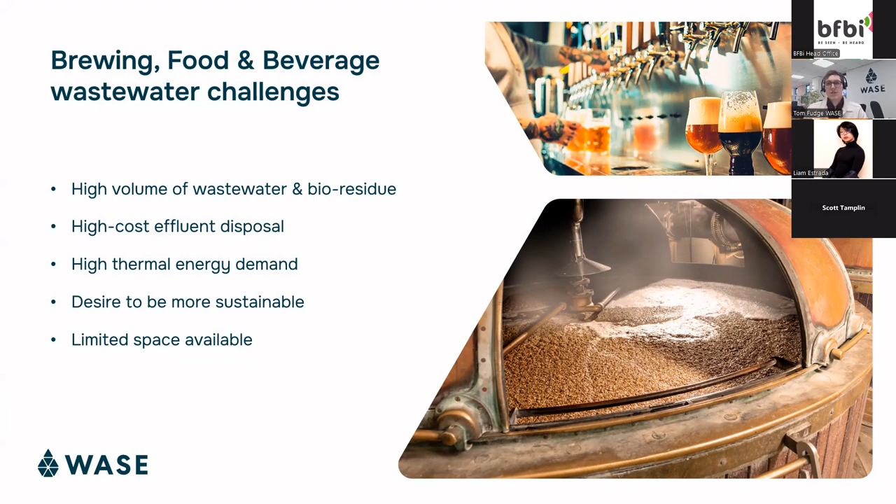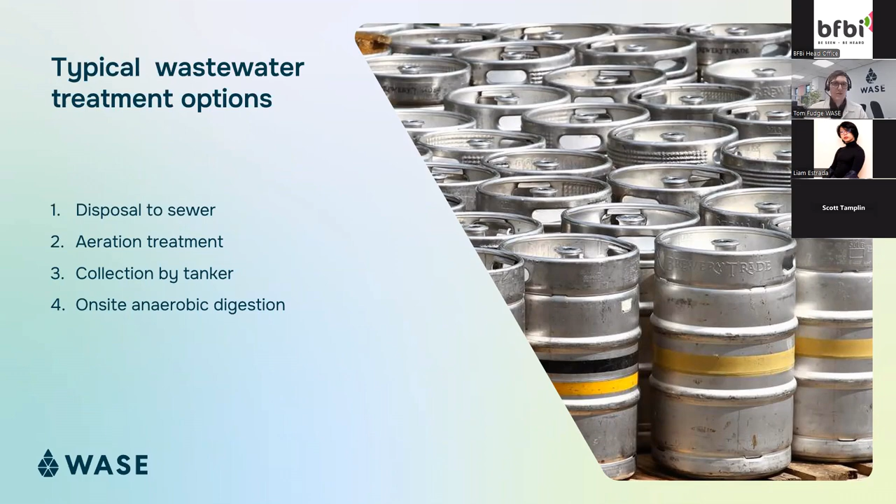If we look at the typical wastewater treatment options available to food and beverage organizations: disposal to sewer, if you're able to do that; on-site aeration treatment; collection by tankering to have it hauled off site; or on-site anaerobic digestion. We're going to explore these later.

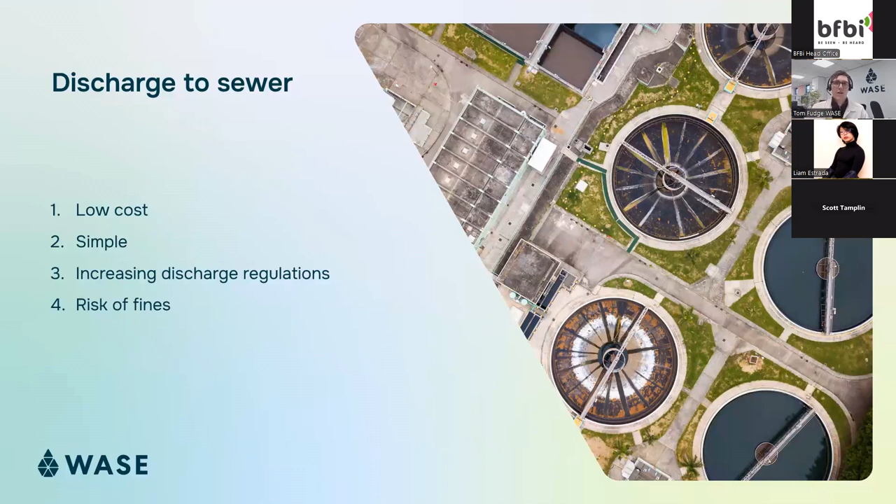Looking at discharge to sewer, this is quite a low cost, simple solution if you're able to do it. But there are increasing discharge regulations and permits on what you can put down the drain, and quite often you'll need to segregate a lot of the high strength wastewater. There's also potential risk of fines that we see for some of our customers when they get an influx of high COD wastewater. Having something on site can build in much more resilience.

Discharging to sewer also has quite a big impact. As many people know, in the UK 2% of energy demand goes on wastewater treatment at utilities, and this is because they're based on aeration processes. When you add higher strength wastewater from the food and beverage sector into the sewer, you're actually diluting it with a lot of rainwater and other types of wastewater, making it much more energy intensive to treat because you're treating a much higher volume of dilute waste.

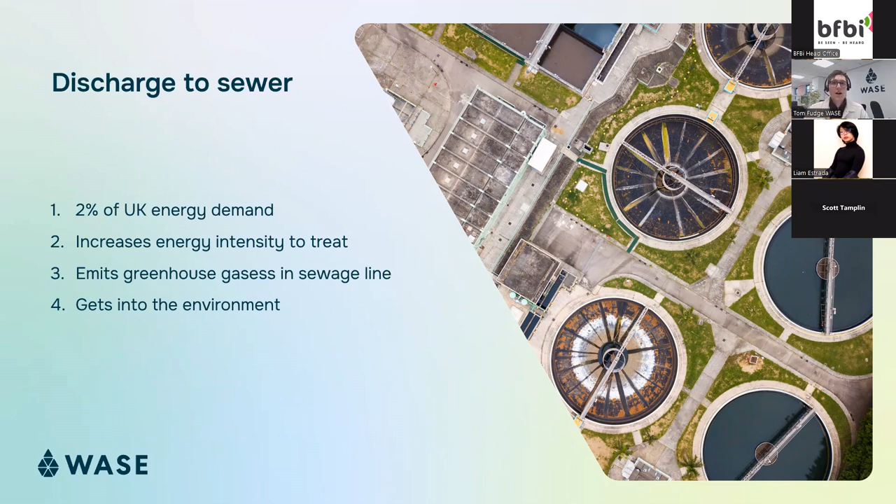It can then emit greenhouse gases in the sewage line. There's new research looking at the methane that can be emitted because it's being broken down anaerobically in the sewage treatment line. And on days with really heavy rainfall, there's a risk it could get into the environment as well.

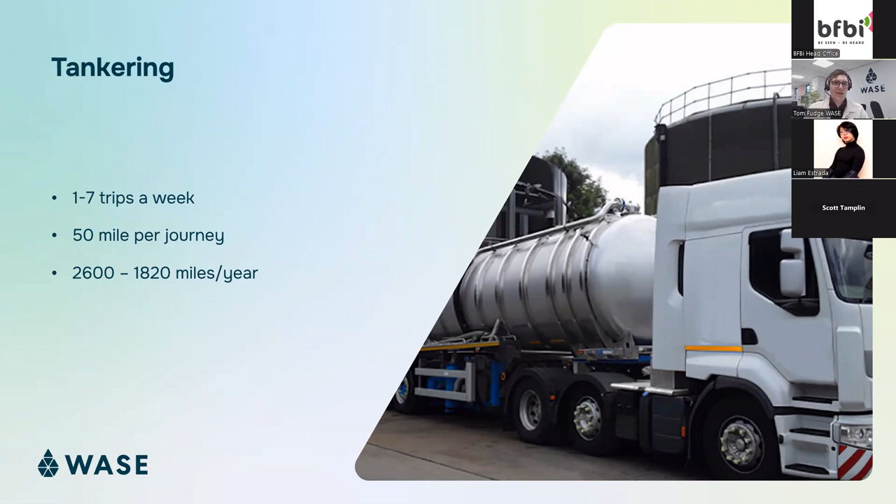If we look at tankering, which is really common within the food and beverage sector, to take off that higher strength wastewater or bioresidue that can't go into the sewer or be treated on-site, typically we see customers doing 1 to 7 trips a week, maybe 50 miles per journey. That could be 2,600 to 18,000 miles a year. If you were tankering 7 times a week doing 18,000 miles, that's the equivalent of driving a truck from Bristol to Ghana, South Africa, Kenya, and all the way back home. That's a huge amount of distance traveling and driving that waste around the organization.

I'm assuming you want to drive all your food products around that way, but not your wastewater. To do this, you're probably paying over £100,000, emitting 22 tons of carbon, and using 8,000 litres of diesel. But really importantly, you're driving away about 300 to 400 megawatt hours of renewable energy that you could recover on site using the right solutions.

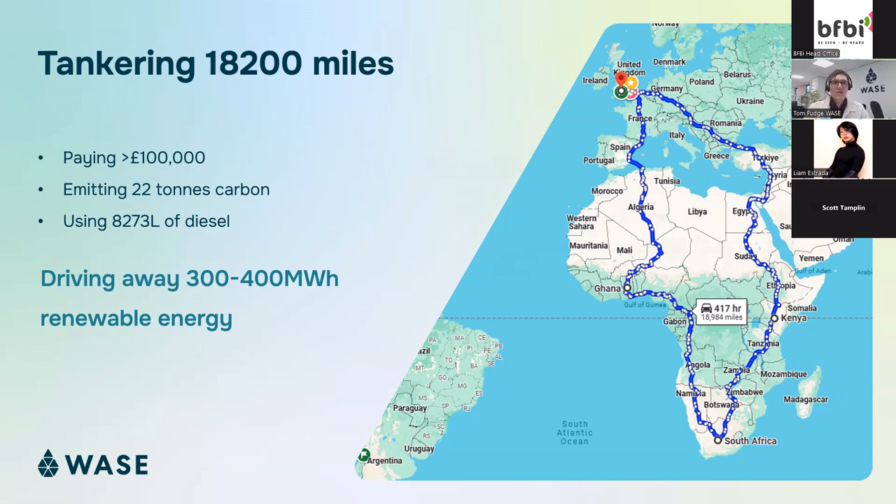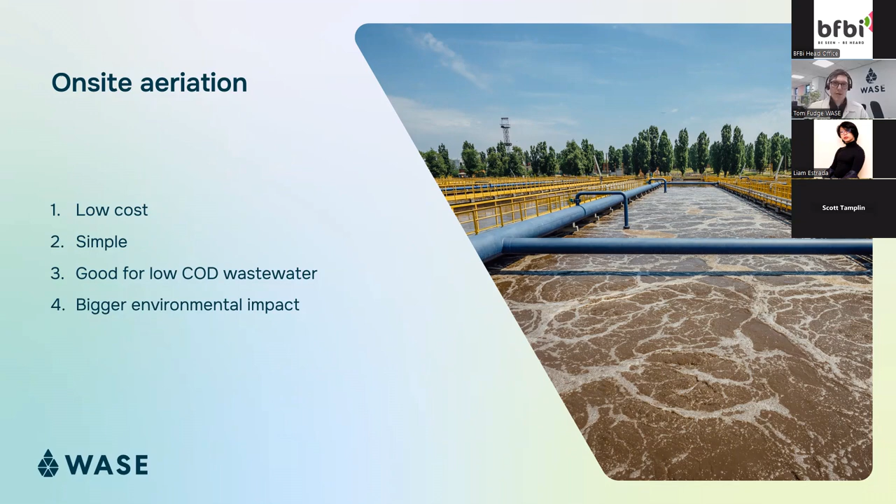Using aeration type technologies, it's quite a low cost solution. It's quite simple to operate, but you do have to be aware of the bacteria and the biology within the system. It's good for lower strength COD wastewater, but it does have a bigger environmental impact because it is quite energy intensive.

You have quite tried and tested technologies. A lot of organizations have DAF systems, but you have quite high chemical usage with DAF, and you generally generate high volumes of sludge, especially where you're adding polymers into the process that then needs to be tankered and hauled off site.

You then have moving bed biofilm reactors, membrane bioreactors, and membrane aerated biofilm reactors, all increasing in efficiency, but also increasing in cost.

But one thing with aerobic treatment is you always generate high volumes of sludge, and these are really good for targeting lower strength wastewater treatment.

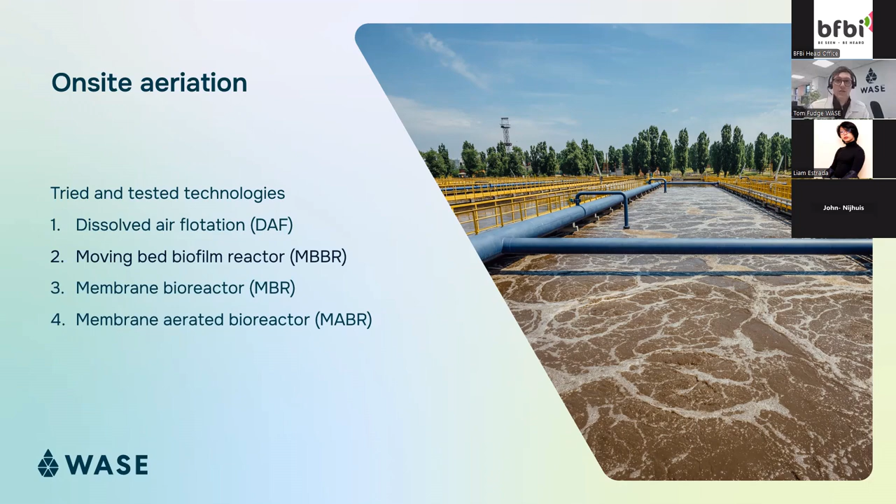So just recapping, you have lower cost to high capital cost for aeration treatments, with DAF being very low cost, MABRs being a much higher cost. You have the high energy demand, the additional chemicals, and you generate sludge.

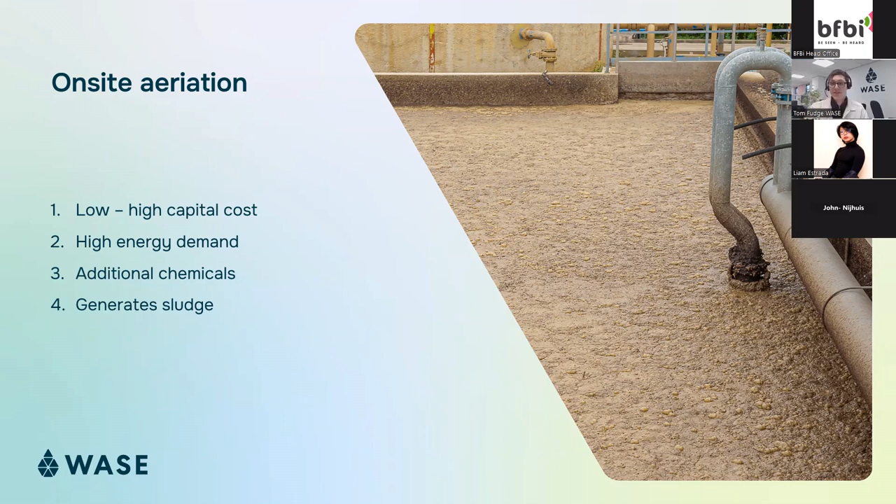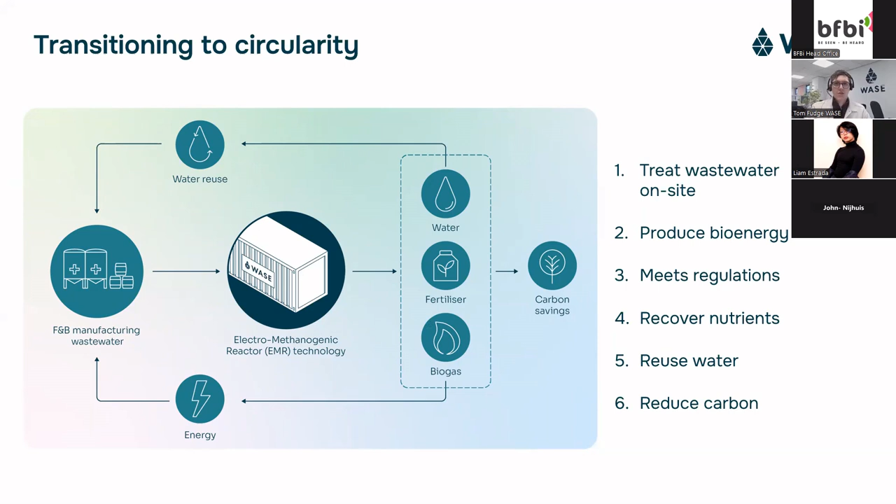So if you want to look at transitioning to circularity, to treat your wastewater on site, recover bioenergy so you can meet the regulations, look at recovering nutrients, also looking at recovering and reusing water and reducing your carbon, you probably would want to start looking at alternative technologies or having a part of a train of technologies where you would look at recovering energy using anaerobic treatments, where you can then recover the energy from the wastewater and also the bioresidues and sludge that you might be generating.

Typically, depending on the process, it will have a slightly larger footprint than an aerobic process, but you do generate a lot lower amounts of sludge.

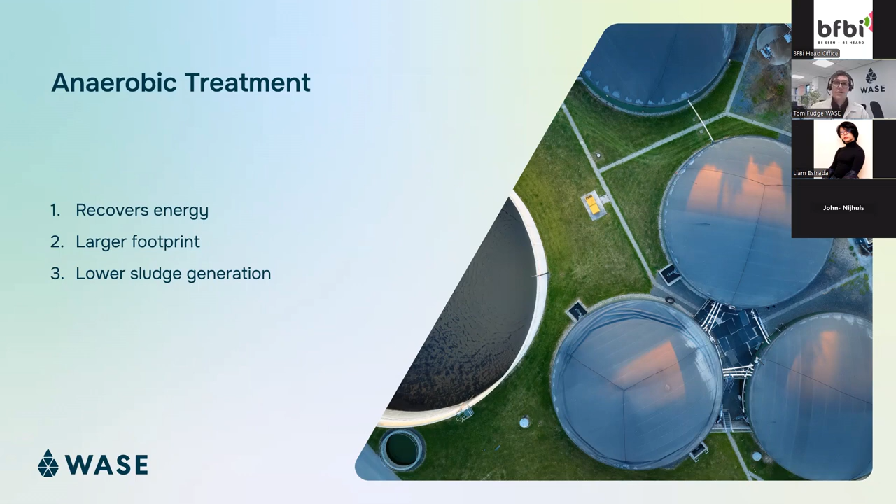So the typical plants are anaerobic CSTRs, continuous stirred tank reactors, which you can see in the image below. These are really good for very high solid wastewater streams.

And then you have your upflow anaerobic sludge blanket systems, which are used for lower strength COD wastewater. You need to make sure you remove a lot of the suspended solids from this system because you have a granular bed within that process. If you have too many solids within there, that can float out the granules and you'll need to reseed those processes. So they're much more suited for larger organizations where you have a very stable wastewater stream that isn't very high in strength.

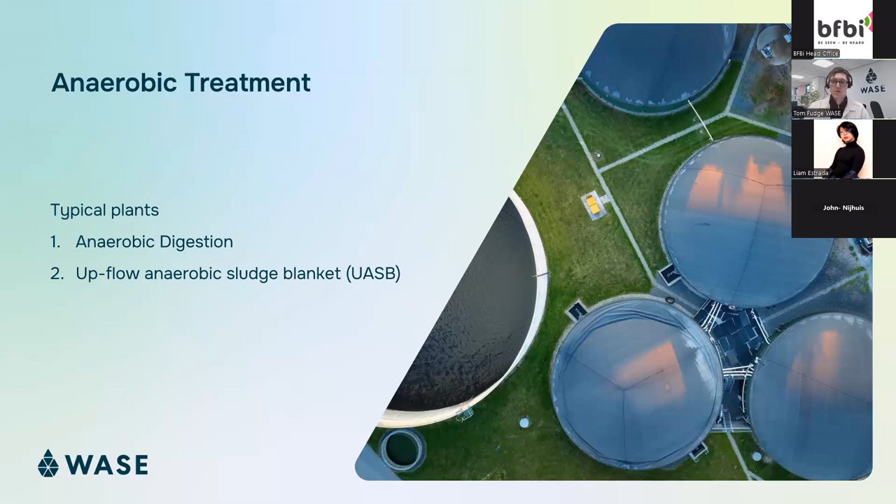Now, there's a new generation of technologies coming out that form under bioelectrochemical systems. Within this, you have microbial fuel cells, microbial electrolysis cells, and electromethanogenic reactors.

Microbial fuel cells use bacteria to generate small amounts of electricity, and it can provide more of an energy neutral wastewater treatment. Microbial electrolysis cells can also be used to generate hydrogen. You need to have membranes within the system, so you do lose some of the efficiency and you increase some of the maintenance of the process.

And then you have electromethanogenic reactors, which I'm going to go into a bit more detail, where it's a membraneless technology, so you can treat lower strength wastewater to high strength wastewater with quite high solids content up to 7%.

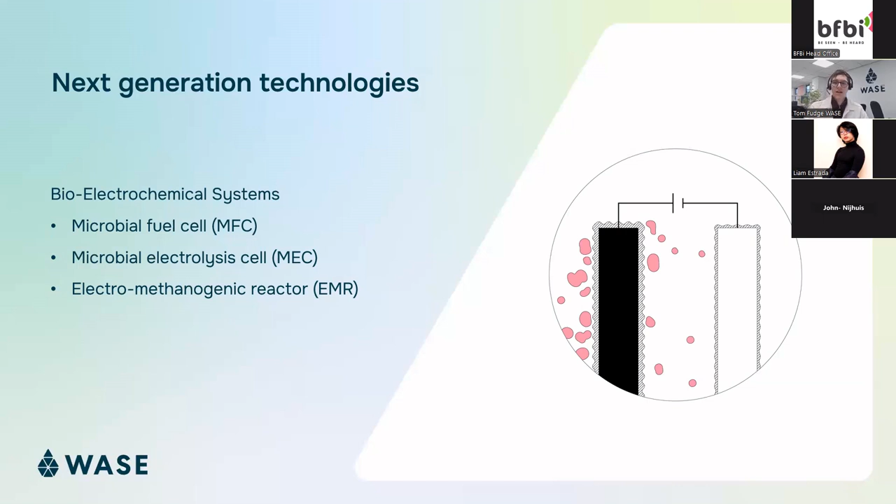So if we look at anaerobic digestion and compare it to the electromethanogenic reactors, with anaerobic digestion you have a giant tank where you grow bacteria and you have organic waste going into the reactors. During that process, you go through 4 stages of breaking down the organics from the more complex organics into methane. And during that process, you generate biogas at about 50 to 60% methane concentration.

Because you've got 4 stages of this treatment, you do have competing reactions within the process. Because the bacteria are just in bulk liquid, you have to have quite long retention times to make sure you don't flow out the bacteria. So this is why it's really only suited for larger continuous stirred systems for higher strength wastewater. And that's why they have quite a large footprint, to make sure you have good residence time and you don't throw out the bacteria.

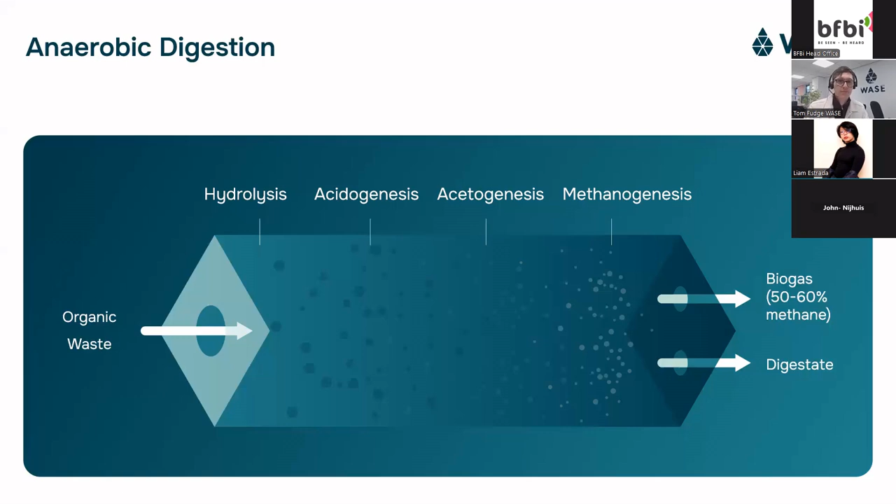What we've developed is a new bioelectrode technology where we integrate that into an anaerobic reactor. This means that we can grow biofilms on these electrodes, and we can accelerate the breakdown of organic compounds, and we can have much faster throughputs because we can break down the organics quicker, but we also have a fixed biofilm.

The process also increases the gas quality and the gas yields. So we generate biogas with about 70 to 80% methane on some of our feedstocks, and we reduce the amount of organics within the wastewater.

So the way it works is we grow electroactive bacteria on these electrodes, and they form biofilms. And what they do is, as they break down organic compounds, they release those electrons from themselves onto the electrode surface.

We capture those electrons and supply a small potential to direct the flow of those electrons. That means we can start generating hydrogen ions inside the reactor and convert the carbon dioxide fraction of the biogas into methane. So this is how we get high quality gas compared to a standard anaerobic digestion system, and we can also increase the yields.

This means it's much easier to integrate into existing boilers that you might have on site. It can also help improve the efficiencies of a CHP system as well.

Compared to anaerobic digestion, we typically see that we can treat the wastewater about 3 to 10 times faster than standard processes. We can have the organic loading rates you might get with an upflow anaerobic sludge blanket system, but with a much higher solid content that you don't need to remove, so you can extract more energy. We typically see about 30% higher energy yields, and a 30% increase in treatment and COD removal from the wastewater.

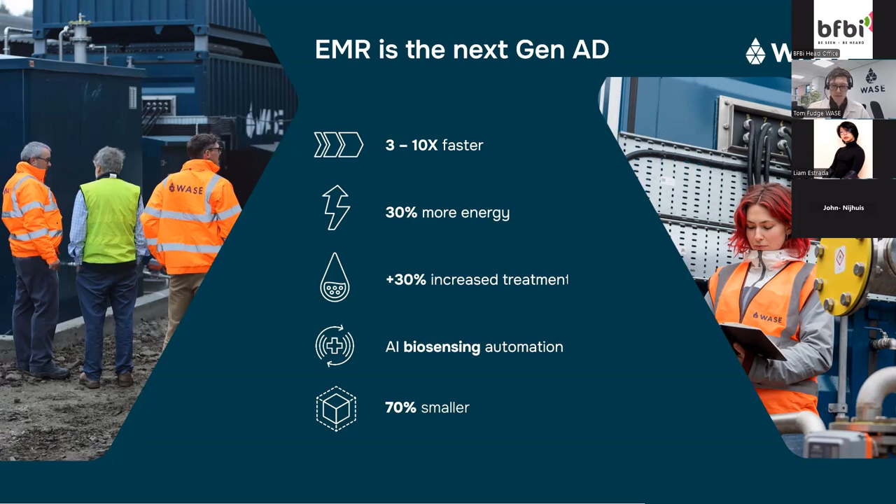Here you can see a study we did with GRDF, the French gas distribution network, where we looked at the raw feed from food waste that was extracted, and we generated 29% more methane than a standard anaerobic digestion system. We were able to further validate that we could extract more yield by taking some of the digestate from an existing plant to further break that down and increase the amount of methane that can be generated.

This also increases the stability of any digestate that's being spread to land, because you're really extracting all of that methane from it, so you can utilize that on site.

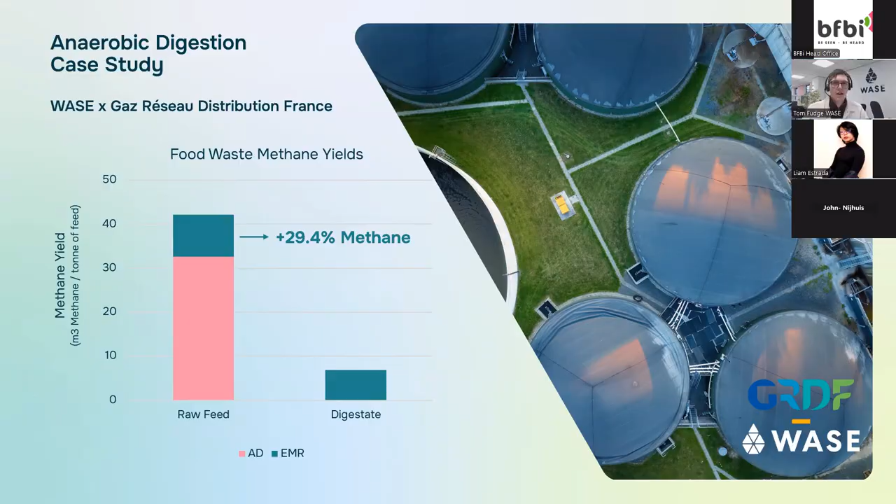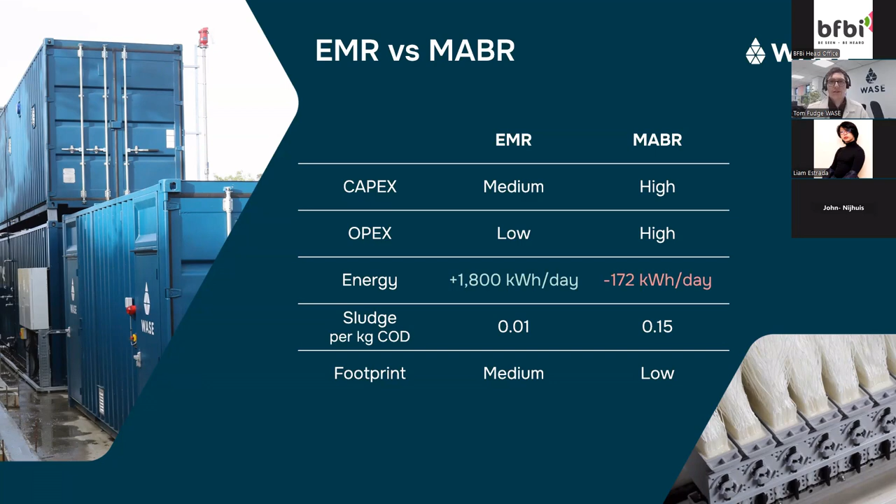We also looked at a case study for a customer comparing our process to an MABR system. We found that the CapEx of our system was lower than the MABR, the OpEx was low, and we were able to generate over 1,800 kilowatt hours of energy a day compared to the MABR using energy for that process. Because it's an anaerobic system, we would generate less sludge than the aerobic process, but it does have a slightly higher footprint than the MABR because of the much faster process.

So how small can we go? This is a site we have at a dairy farm. There you've got the dairy shed on one side, and then a cliff with trees on the other side. So it's a really small area where we had to fit the system.

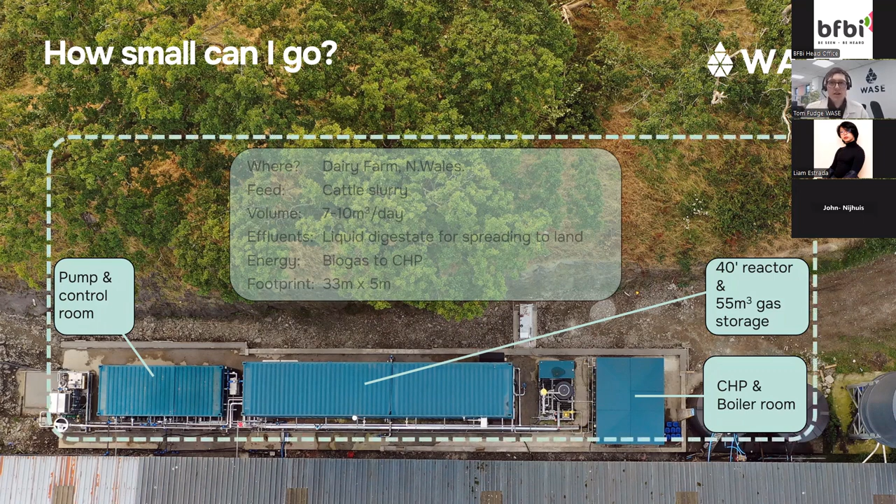Due to the modularity, we could quite easily put it into this place while still having access and walkways for the customer. Here you can see the pump room, our reactor, and also gas storage on top, and then we have a CHP and a boiler room. If we were to look at a standard anaerobic digestion system, the plant would actually take up the area around the dotted line here. So for this customer, it wasn't actually a feasible option for them.

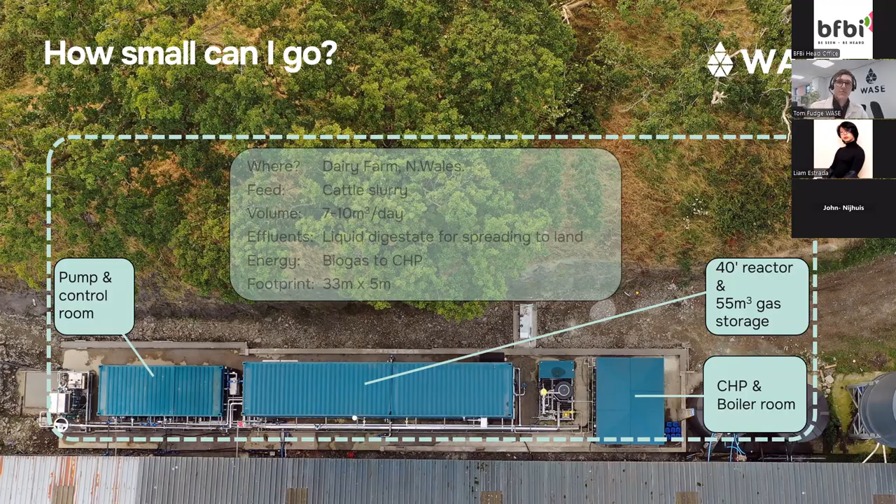The system is really modular, like a Lego brick wastewater treatment system. We've designed the modularity so it can be fit to your size and we can scale it up. It also means you can install a small unit and then increase the number of units at later dates, if you want to add new waste streams or expand. So it gives you a lot more flexibility than trying to design a much larger system while thinking about what you have to do in the future.

So now we're going to go through a couple of case studies. Hepworth Brewery is one of our case studies. I'm going to introduce you to Andy, founder of Hepworth Brewery, who produces between 20 and 30,000 hectolitres of beer. They produce their own beer, but they're also a contract brewer as well.

Andy is really sustainability driven. He's put in a lot of effort to look at improving the way Hepworth can operate, and is really a leader in this space for breweries. He's integrated CO2 recovery on his facility, he's got solar for electric, he's also recovering heat from the fermentation process, and he's now integrating a wastewater to energy plant with us.

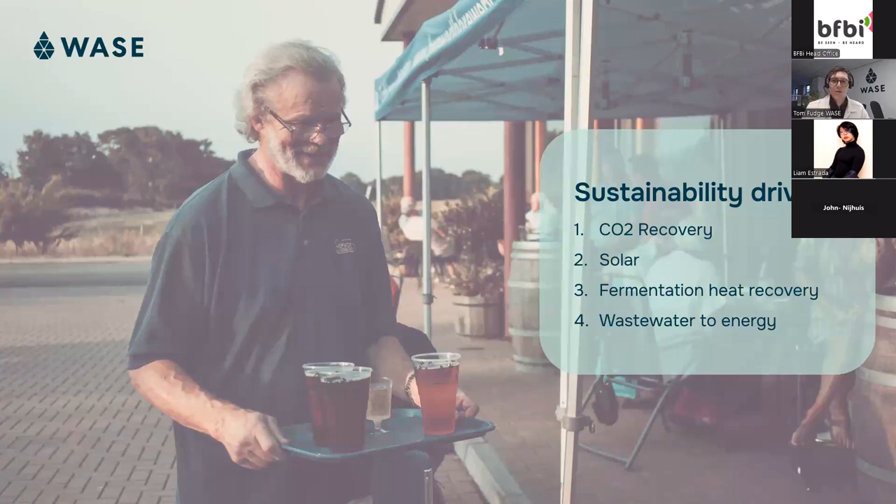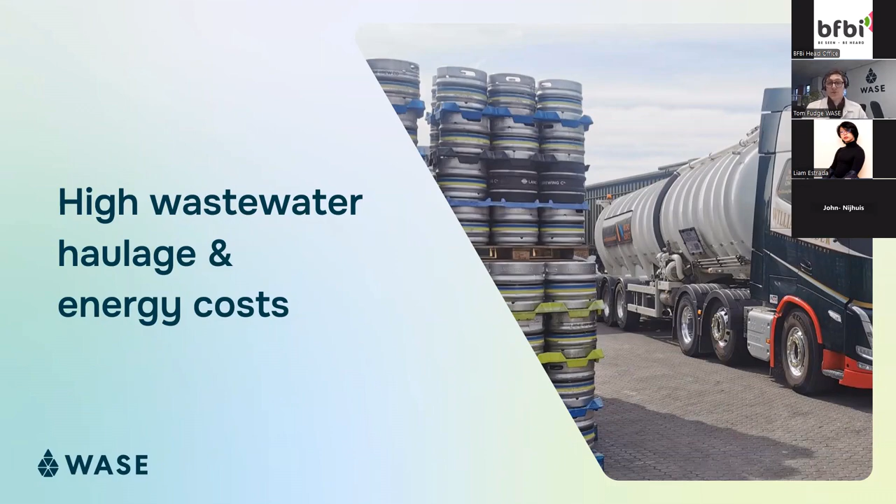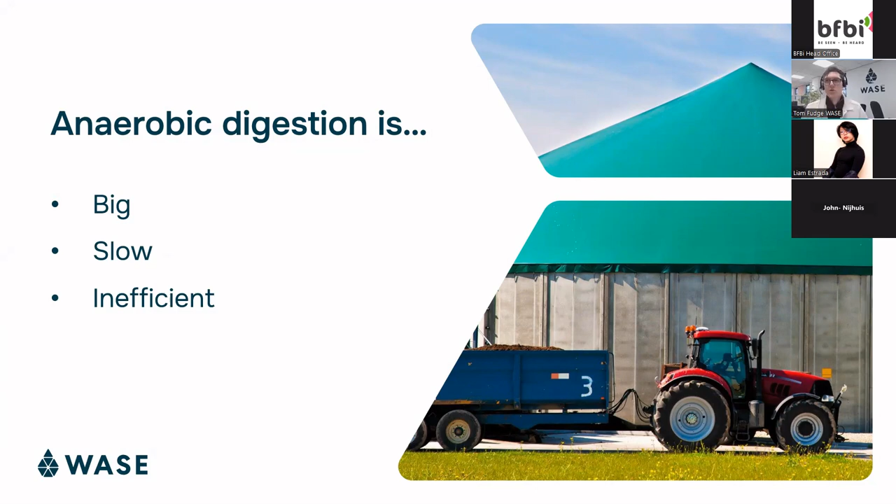So, like many people, Andy had really high wastewater haulage costs and energy costs. He wasn't able to discharge to sewer, so he had to have that wastewater collected every single day to be treated off-site. He looked at installing an anaerobic digestion system, but because it was quite big, slow, and inefficient, and wouldn't meet the regulatory requirements for discharge on site, he would have had to purchase more land as well. With the areas where he wants to look at expanding, it was quite difficult to think about actually sizing this kind of facility.

So we helped Andy to really look at validating the circularity of our technology, so we could treat the wastewater and then return it back to the environment safely. There's an opportunity down the line to look at reusing some of that wastewater for cleaning. Then we can look at recovering the biogas that is going to go into a combined heat and power system to provide heat and electricity back to the plant, and it saves carbon.

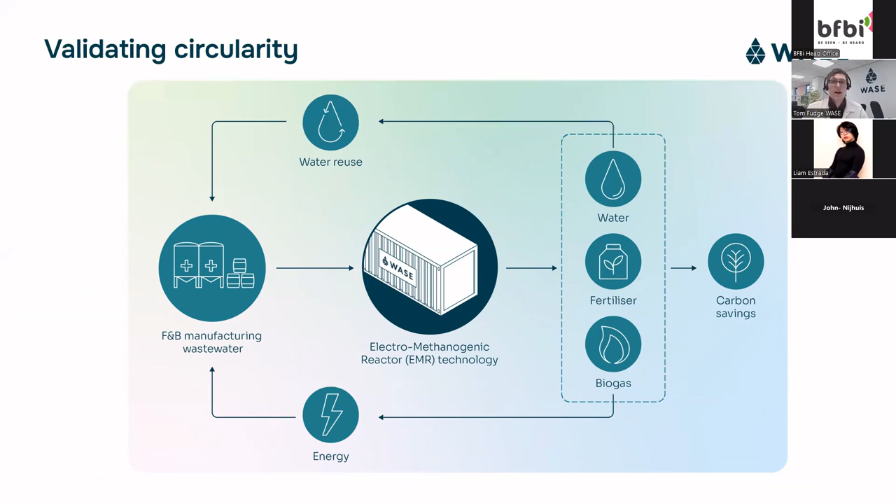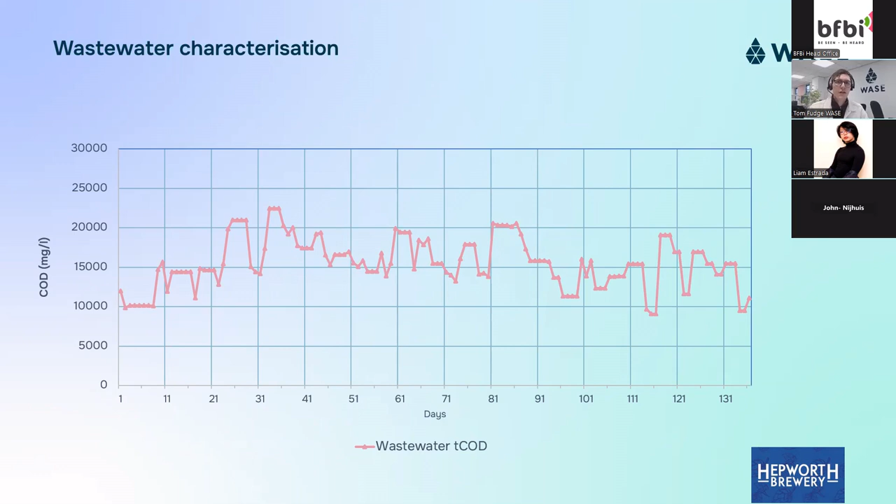One of the key things we discovered during the trial was the variability in the wastewater strength. It would go from just below 10,000 up to like 23,000, 24,000 at periods. So there's a huge fluctuation within the wastewater. What we were able to see is that we could provide really good COD removal rates, even though there was that huge fluctuation throughout the process, due to the stability of our system.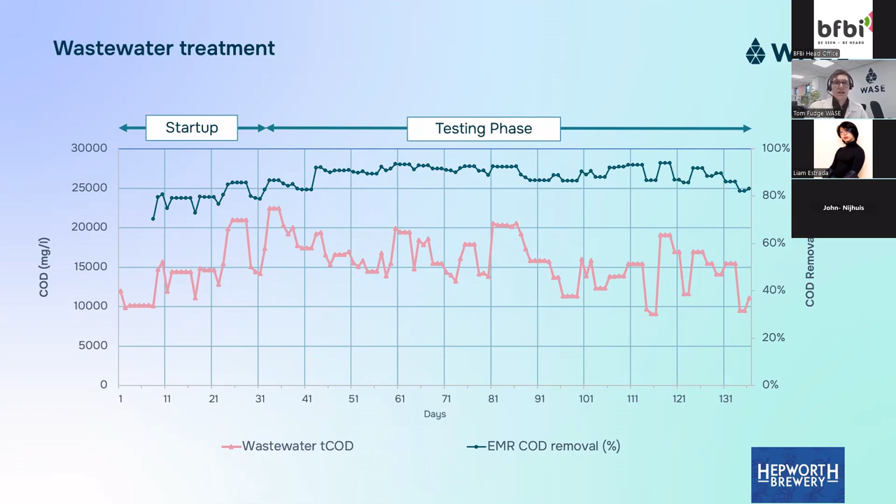But one thing that's really key to note is when you do have high fluctuations, there is a risk of having high organic acid accumulation within the process. That means you can build up acid, which can affect the pH of the system, and that can affect the bacteria.

During this period, we noticed that if it was a standard treatment system, you would have 11 periods of risk—that's about 2 to 3 periods per month because of that variability in the COD within the system. We had a person on site constantly measuring the FOS/TAC.

What we've now developed is a machine learning tool, so we can predict what the FOS/TAC is in the system completely remotely. We can then use that to automate the plant and control the pumping, so that if you do have the spikes in FOS/TAC or variability in your COD, the pumps will automatically control and vary the feeding rates so that you remove these risks during the feeding period.

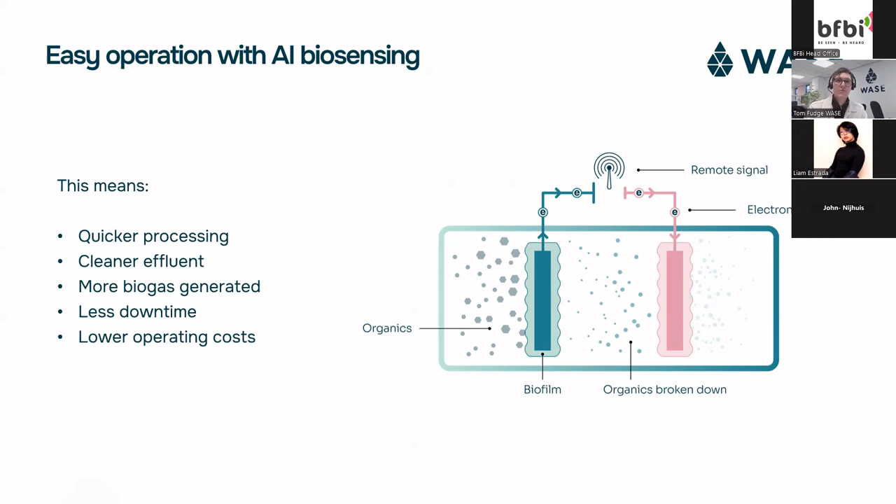We've had 95% accuracy in predicting the COD as well. We've integrated that into an online dashboard that all your operators will be able to see, so you can look at the uptime, the energy efficiency of the plant, the COD removal, and a key one is the microbial health, which is a unique indicator that comes from the process of the electrodes being out throughout the whole reactor. We're the only ones who can give you this data throughout the whole of your process, and not just at one single sampling point.

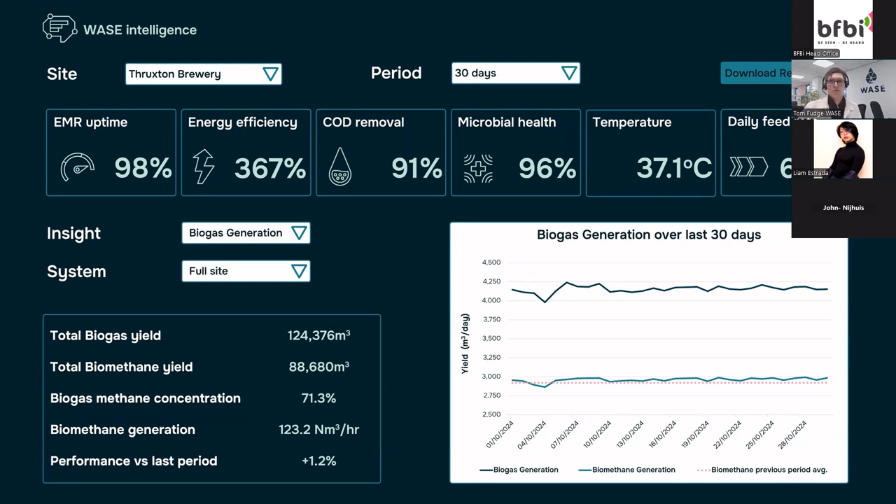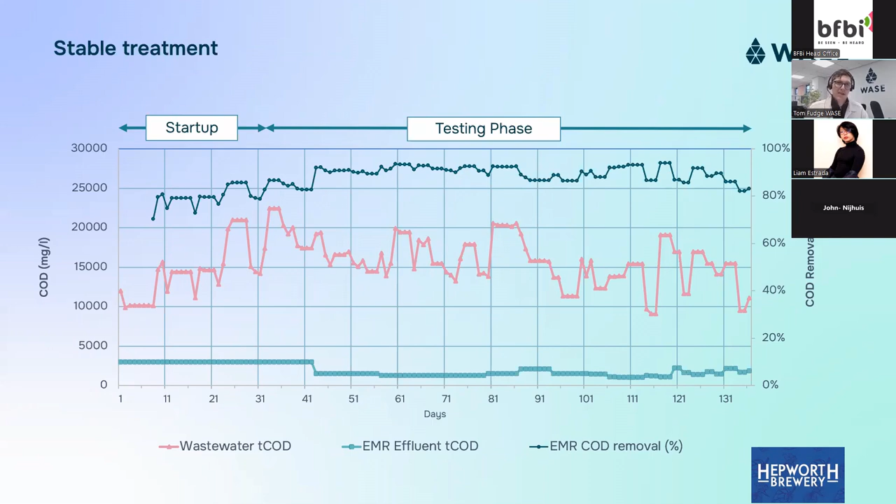During the trial, we really looked at optimizing the system. We were looking at increasing the organic loading rate of the process to then optimize the site design going forward. So we moved from quite a low organic loading rate as we were inoculating the system, and then moved up to reach quite a high loading rate. We were then having quite a low hydraulic retention time, between 1 to 2 days, where we found the optimal treatment rates, so we could design the system suitable for that site.

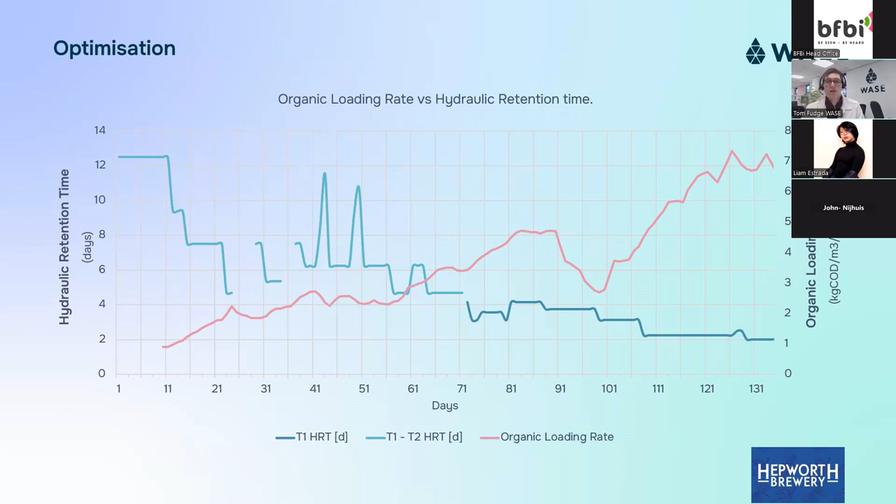During the increasing organic loading rate, we were able to show that we could generate really stable biomethane concentrations, increasing the biogas methane percentage to just over 70% by the end of the trial. Whereas a typical anaerobic digestion test from this feedstock was about 56%. So quite a significant increase in the gas quality for this facility.

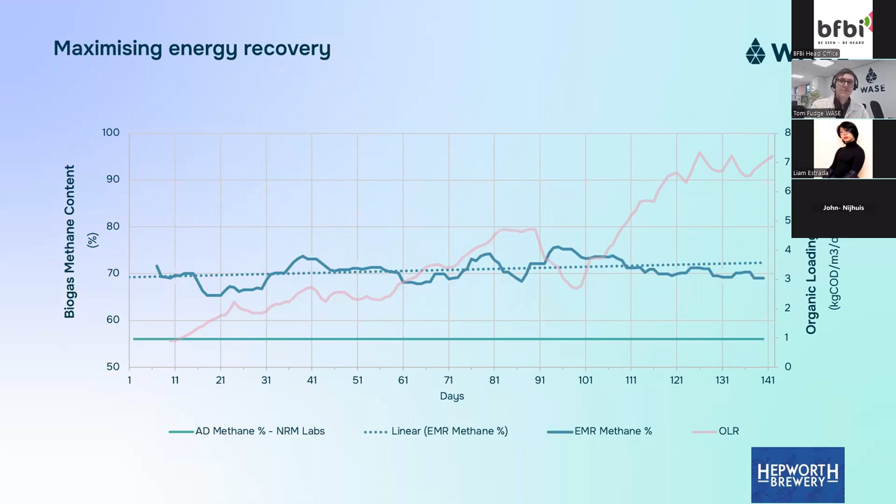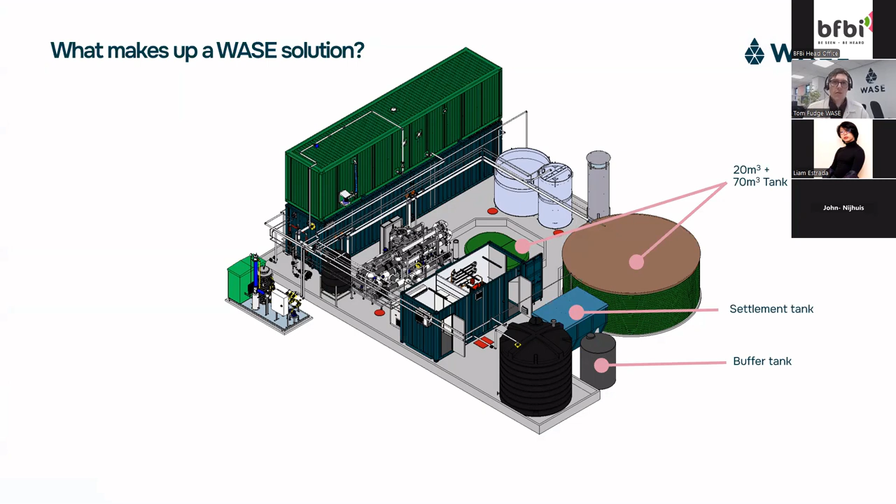So what makes up a WASE solution? Here is a diagram of the facility. We have the existing equipment on the site: initial storage tanks, settlement tanks, and buffer tanks.

What we have as our standard system is our reactor. We have gas storage, both in 40-foot containers. We have a safety flare on site, and then our pump and control room, which incorporates our AI machine learning system to automate your plant. We can then add additional pieces of equipment depending on your site requirements.

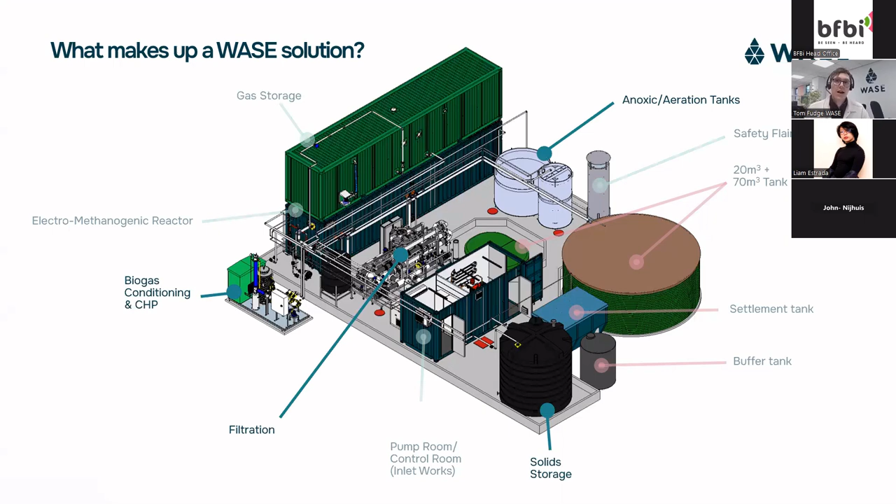For this site, we included filtration and an aerobic step because we need to discharge to watercourse, and there's an endangered snail in the local area. So we had quite strict regulatory discharge requirements, and we integrated a biogas conditioning and CHP system at the facility so we could reuse the heat and the electric.

Over the project, this means there'll be 375,000 in cost avoidance for Hepworth. They could lower their treatment costs by 10%. They can generate 360 megawatt hours of renewable energy a year, and they'll save 100 tons of carbon annually.

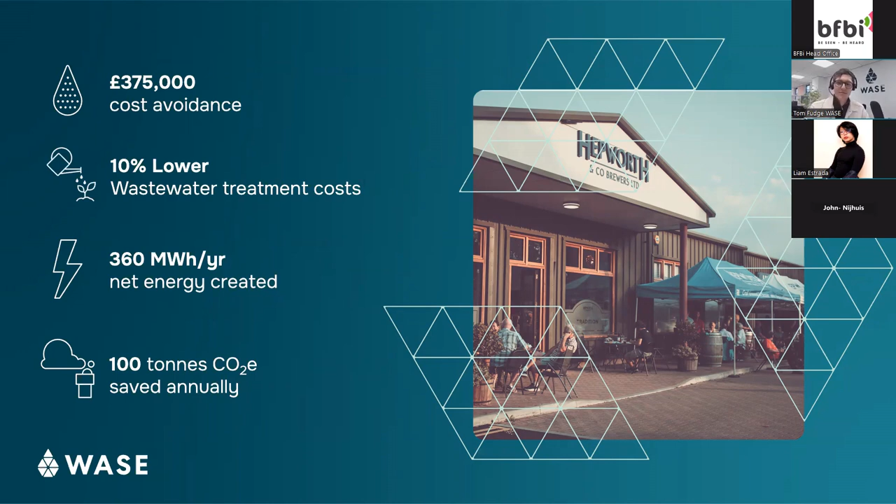And Andy really found that there was a unique compact solution where they could treat all their wastewater on site, and he's been impressed with the trial. We're now starting the installation of the full-scale system, which will be operating later this year.

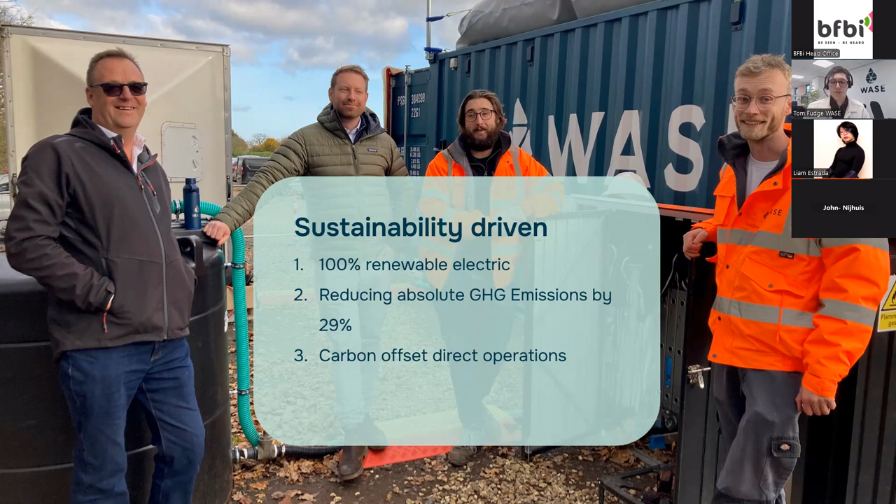The next case study is Cook Foods, that you probably are all aware of. They are really sustainability driven, so they have 100% renewable electric for all of their sites, and they're focusing on reducing their absolute greenhouse gas emissions by 29% by 2030, and they want to have carbon offsets for their direct operations. The current challenges they have are thermal energy demand, sludge production, and wastewater management.

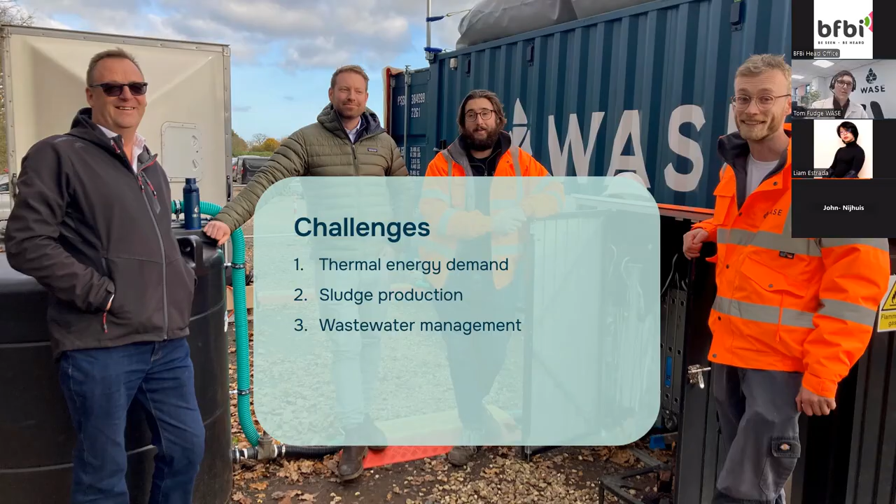So what we did for Cook is we did a pilot system for them as well. Here you can see the same one that was installed at Hepworth, but rebranded at that facility.

What we saw is we had a significant fluctuation in the organic loading rate due to the variability of the COD at this facility. We were manually operating the pumps for this site because the pilot system isn't fully automated. We had really significant high organic loading rate, but one thing that was really good is we were consistently able to generate a good methane percentage even with this variability.

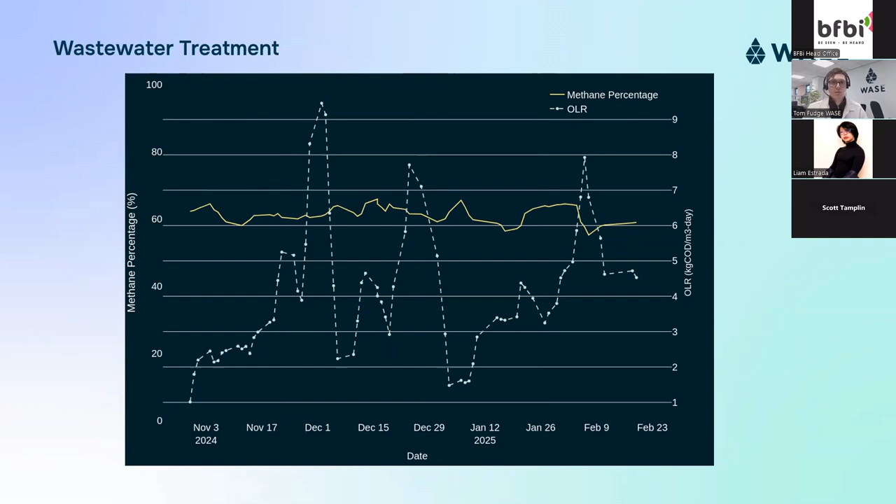Some of the key insights are that the biogas had really low H2S, about 300 ppm, so about half, maybe even more, of what you would standardly get with an anaerobic digestion system. This reduces the upgrading and cleaning of the gas and makes it easier to integrate into boilers.

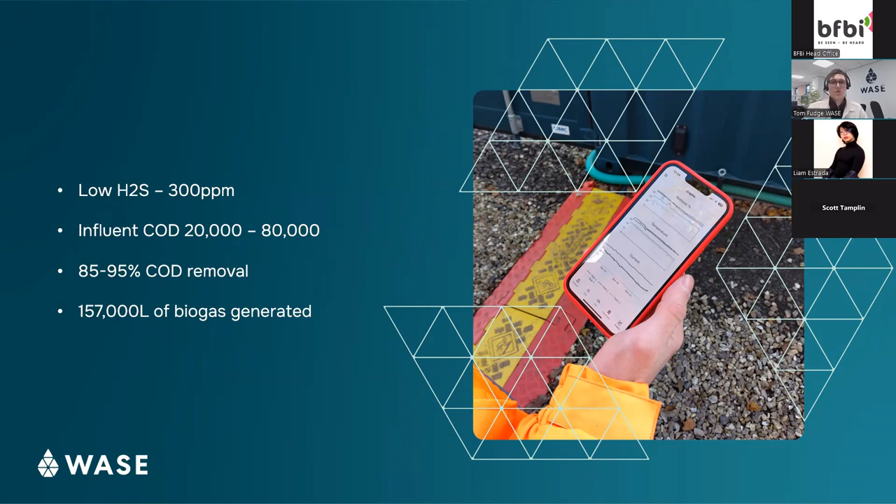The influent COD varied between 20,000 and 80,000, so a huge variability in the system, but we were able to provide between 85 and 95% COD removal. And during the pilot, we generated 157,000 litres of biogas.

The project going forward into commercial stage will generate 3.4 million in savings over 10 years. It will generate 3,000 megawatt hours of renewable energy a year and will save 156 tons of CO2 just from the biogas. And there's additional savings as well from the removed trucking and methane emissions that would come from the sludge.

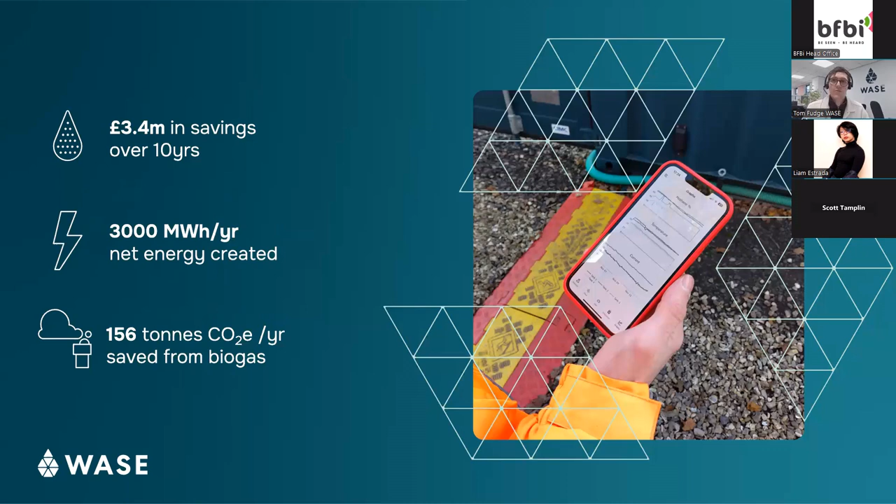Richard, the sustainability director, has been really impressed with the trial, generating gas really effectively, and had really good circularity and sustainability that can then help Cook move forward with their net zero goals.

So together, by looking at new ways of integrating technologies, we can protect our most precious resources.